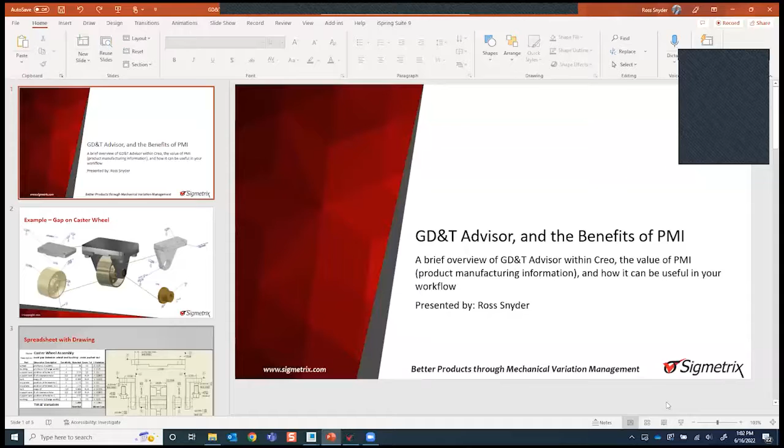Great. Let me get my screen pulled up here. It was giving me a little hassle to share. There we go. You guys see my screen okay? I can see, there we go. Yep. All right, it looks like it's blinking in and out here, so hopefully that doesn't continue. Ross, we see the user, or not the presentation mode of the PowerPoint, just so you're aware. Thanks. Oh, give me 1 second here. It's being a little temperamental with me. All right.

Let's just go ahead and share. There we go. How are we doing? Looking good, buddy. Excellent. All right.

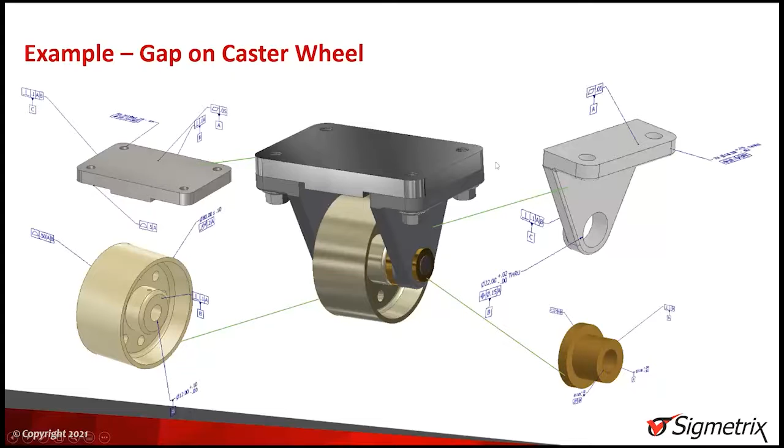Case in point, a lot of the information that you typically would walk through for, let's say, a standard tolerance analysis, like you can see here, if you were using an Excel spreadsheet, you would have to go grab your drawings, take a look at things, and kind of figure out what your tolerance loop is going to look like. All of these different annotations and dimensioning information that you've got on those different prints all have to be manually collected, manually added over into your spreadsheet, or God forbid if you're running through all this on paper.

And every time that you touch one of these different things, it introduces the opportunity for human error, or potentially not having the correct call or information translated to what you're using the information for. Versus adding these annotations in at the ground level in your assembly and them being a permanent fixture of your workflow walking forward.

With that, what I'm going to go ahead and do is pop over to the GD&T Advisor over in Creo that I've got open, and I will need to switch my windows here. All right. Great. So what we have here is a standard normal operating window of Creo.

Now, one of the tools that we have available to us here within Creo is, and I'll close this out for a second so it looks a little bit more familiar, our GD&T Advisor, which is a tool that we created that is available directly through PTC and is a plugin directly in the Creo environment. So if we click on this, what we have is an advisory tool that is going to help walk, especially new users that aren't particularly familiar with adding geometric dimensioning and tolerancing to their parts. Now, this particular resource, again, just a quick add-in here within the Creo environment.

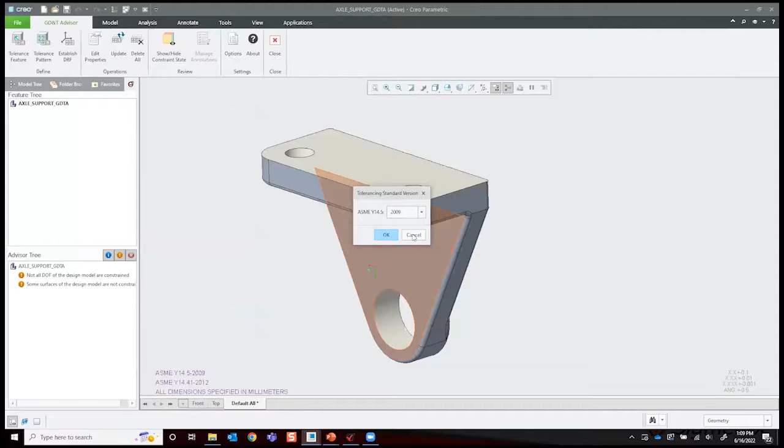Whether we want to change those, we can make those adjustments, as well as adjusting different standards, whether you're trying to follow the 14.5 for 2009 or 2018. Those can be dialed in right here within the GD&T Advisor itself, so that the annotations that it helps assist you put onto the actual part going forward, you can be confident that they're going to adhere to the standards that you're being held to inside whatever requirements that your parts have.

With that, just a quick overview of what and where everything is here within the tool itself, for those of you that haven't seen this before. Over here, we have our feature tree and our advisor tree. These two areas are going to be where most of the specific information, as we walk through the process of adding our different annotations, come into play. The feature tree specifically is going to start showing the different callouts that you put into place, as well as the different datum schemes that you have in there, what's being used, what's not being used, etc.

Down here is the advisor tree. This is more of your information pieces and your advisory notations from the software itself. This is what's really going to let you know that you're missing things, something's not quite right, etc. Over here, obviously, we've got our main screen where we can see the part that we're working on within the Creo environment. Up here at the top, we have all of our different toolbars. This is ultimately where we're going to spend most of our time today, just using the tolerance feature and a little bit of our properties. And I'll show you what the cool multicolored box does in a little bit as well.

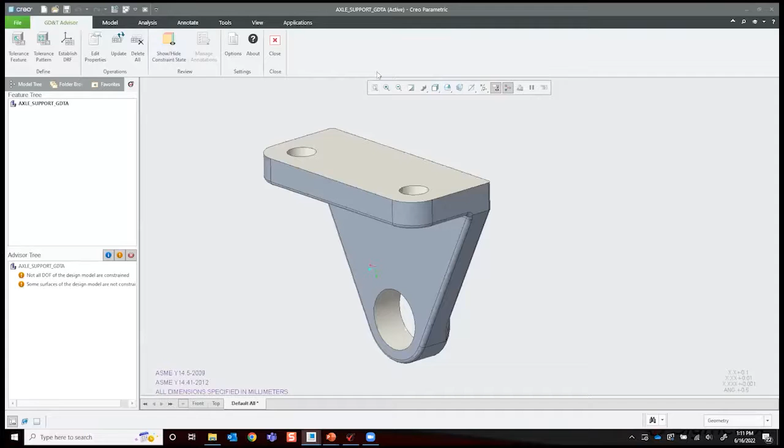With that, this part here that I have open right now may look a little bit more familiar if I rotate this, kind of like the picture that we had earlier. So this is one of the supports that was in that caster wheel assembly, where it bolted up to that top plate, and you had the wheel up in the center, and there's another one of these on the other side. So what we're going to do is add the PMI information, the actual GD&T annotations, to this part here that we're then going to later use in the CETOL environment. And I'll show you where that information, once we have it accurately placed, which is already a great thing to be able to do, can be useful downstream in your workflow as well.

So with that, we can see over here, our advisor tree is letting us know that not all of our degrees of freedom in the model are being constrained properly, and some of the surfaces are also not being constrained. So those are going to be our two targets today as we go through and try to add GD&T to this part, that we really want to take care of those two items.

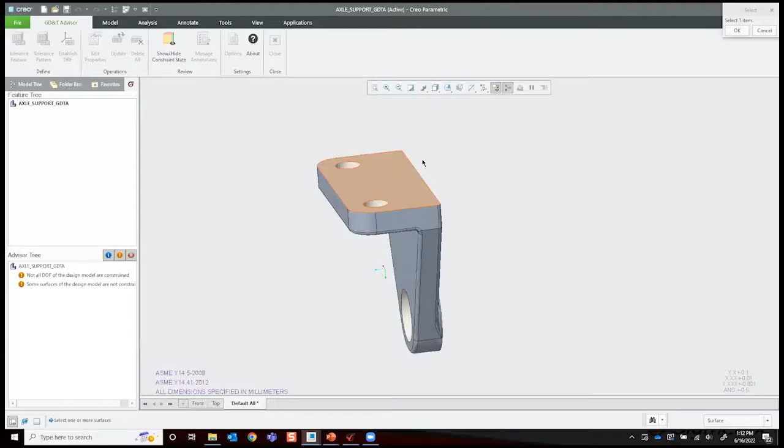So to start things out, we're going to need our first callout, presumably what we're going to call our datum A. So what we're going to do is hit tolerance feature. And I know that the main thing that we mate up to that top plate is this top surface. So let's go ahead and select that, and we'll hit OK. Now, what you can see up here is that our toolbar has changed, and this window has popped up for us to populate effectively what is going to be inside our reference frame for our GD&T callout.

So you can see here, we can name this if we'd like to. We can pick what kind of a scheme we're going to be doing, whether it's just going to be a regular dimension or what we're targeting for everything here today is going to be our geometric tolerancing. And this is where we're going to pick the information that's going to be going into the actual frame itself.

So we can see here already that it's recommending that we go with a flatness callout, which is what we're looking to do. So if you're a newer user, you're not really sure what you need to be using for things, GD&T Advisor is going to make recommendations that are logically based off of either what you have defined or the kind of surface that you've got called out. You can see there's a little asterisk right there. That's kind of the best guess the software has for walking through that process. So we're going to leave that as flatness here.

Now, admittedly, I have a sheet in front of me that effectively is our print for this. So I know what the tolerance value needs to be. But this is where we would add our tolerance value for the actual callout, which will be 0.05. And then over here on the right, you can see that it's recommended, especially because this is one of our first features and we don't have any other datums going on, that this be a datum feature, and it is going to be our datum A.

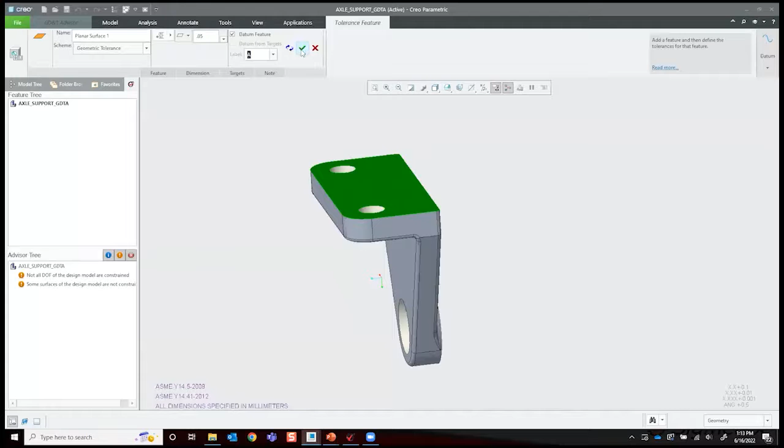Now, we can make adjustments to that. We can turn that off if we're trying to just add a quick annotation to something. But for this particular one, the GD&T Advisor's got this spot on. We're looking good. So we'll hit the little check mark here. And then you can see that it's dropped the annotation right onto the part over here.

Now, we have that first DRF that has been placed, and we're not using it for anything yet, but that'll change shortly. And we still have a couple degrees of freedom here that we need to account for. So let's go ahead and try to get our datum B in. Now, datum B is going to be over where this flat surface mates up with our bushing that pushes into here. So we'll go ahead and pick tolerance feature, and we'll select this flat surface here and hit OK.

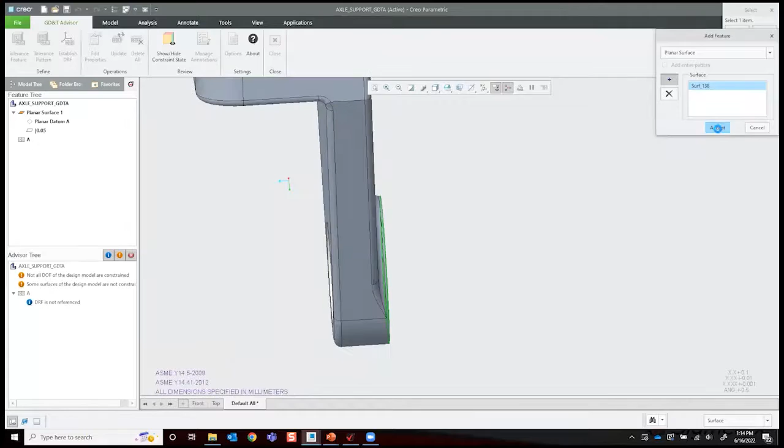And now, again, you can see that up here at the top, it's changed, but this time our recommendations are a little bit different than they were last time. So now we have that first datum that we could potentially be referencing. It's not the only thing out here. So we've got a couple of different recommendations that the software is putting out in front of us. And perpendicularity is what we're going to be looking for. And because we're doing that, we also are going to reference that datum A for this particular callout as well, which it automatically generated. And we could potentially change that if we'd like to. But again, GD&T Advisor's got it spot on.

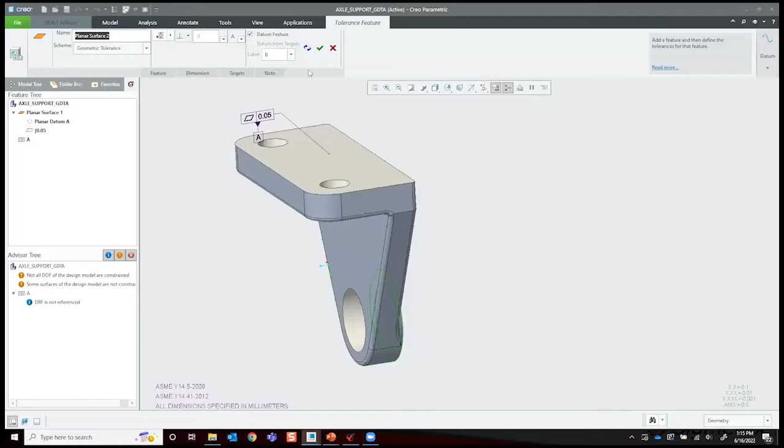And I'm going to go ahead and change that to a 0.1, which is what that's supposed to be here, according to our print. And datum B is what we're going to be leaving that as. We can go ahead and check that box and hit OK. So now we've got those two callouts, and that's looking good. Still missing a couple things here for controlling this for all of our different degrees of freedom.

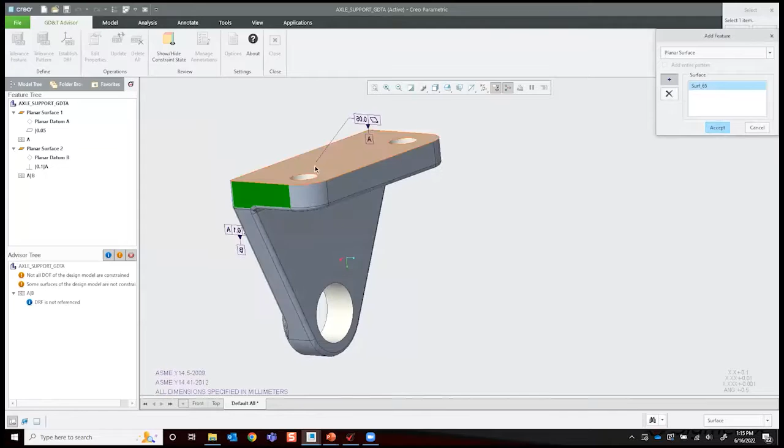And it looks like we took care of that, not using our DRF for just A, but now AB is not being used. Well, we'll be taking care of that when we add in our datum C, which we'll do on this back surface here. So we'll have that flat, this flat, and this flat here to control our different degrees of freedom.

Now, looking up again, this is recommending we use the perpendicularity, which is fine. But as we open this up, there are some different other options that you could use. Something that's cool about this as well is that if you hover over some different items, it will also give you explanations for why it probably isn't the best choice to be using for where you're at right now. And again, we got our little asterisk, so we're going to leave that there. And this one is another 0.1.

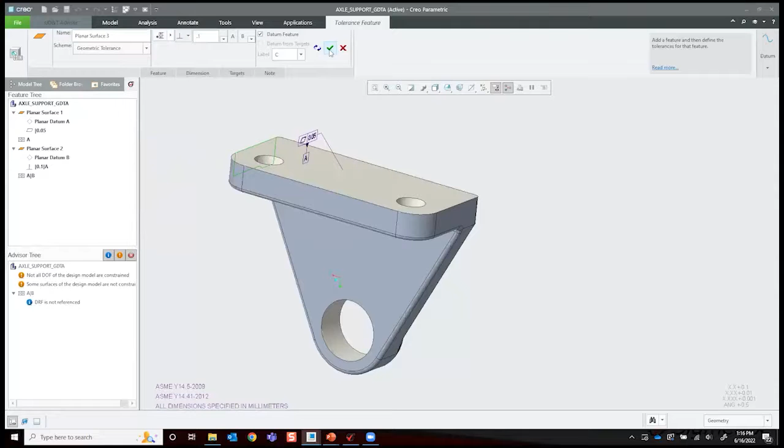That's referencing our AB, which is what we needed over here, and is going to be our datum C. So we're looking good there. Now, something else to keep in mind is if you were looking to add further refinement to any of these, that's something that you can do over here. And you can add additional layers to your callouts here, but we're going to go ahead and put that back to just the single callouts because I would like this to match our assembly that we're working towards later, so that we can see the progress between doing this and using it.

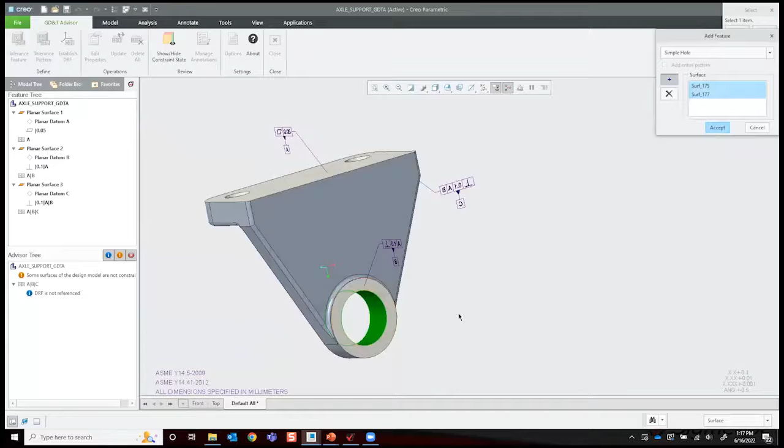So we've got our A, B, and C callouts here, and I will say that we are going to add another callout here because this is a fairly critical feature. I'm going to go ahead and tolerance the actual hole that our bushing goes through and our axle goes through, and hit OK. Now, as we go through, again, walking through the process and the recommendations, it's got our position tolerance in place, which is what we're looking to do. And that particular value is going to be another 0.1.

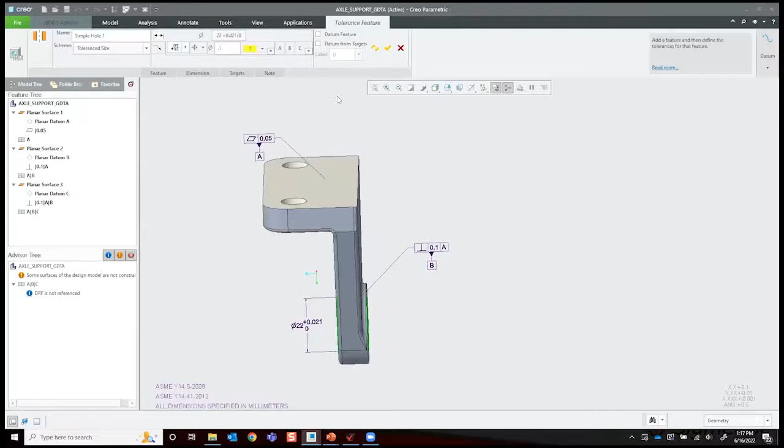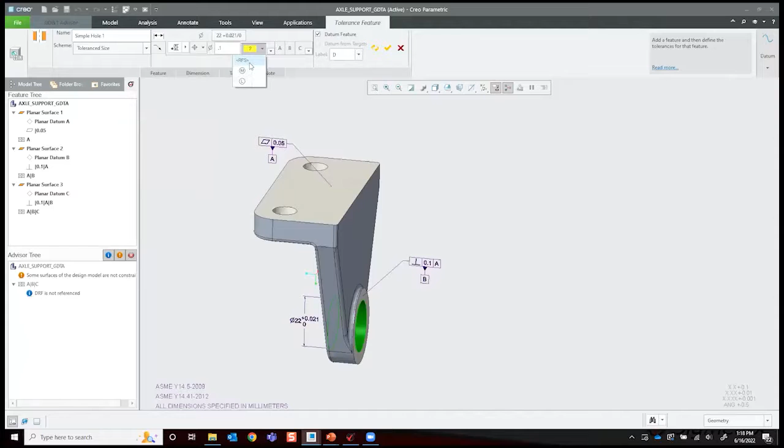We only need this for referencing A, I'm sorry, nope, this is supposed to be A, B, and C, and this is exactly what the recommendations were right out the gate. And something else we could also consider doing is adding this as an additional datum if we need to reference this ahead. Now, let's say you've got a new user working through this and everything is going okay. And it's like, okay, well, I'm adding another callout. This has to be another datum. So let's turn that on as a datum feature for right now. And we're going to leave this at RFS and hit OK.

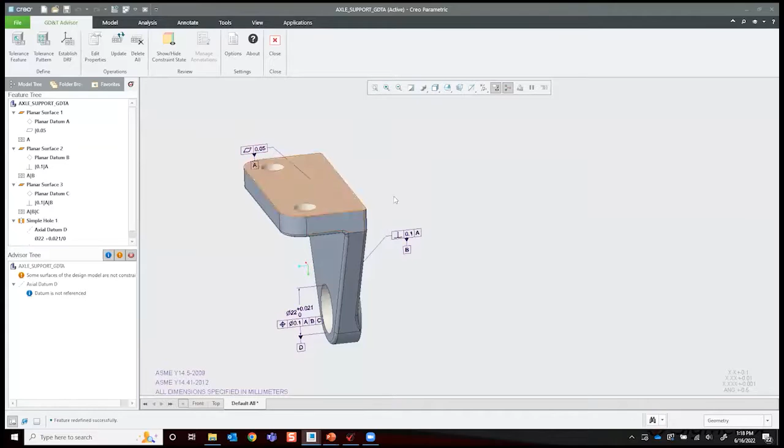Now, while not technically wrong, especially because we're still mid-process, one of the things that is probably not what we're looking to do here is we've called this out as datum D. This was the last callout that we really needed to do for this particular part, in addition to the regular dimensions that are already in place in the actual assembly. We're not going to be using this for anything. And over here in the advisor tree, you can see that it's letting us know that it's not being referenced by anything. So let's go ahead and edit that, and we're going to turn that off as datum D. We really don't need to do that. But that alert to the fact that you're not going to be using anything can be really beneficial for especially some of your newer users.

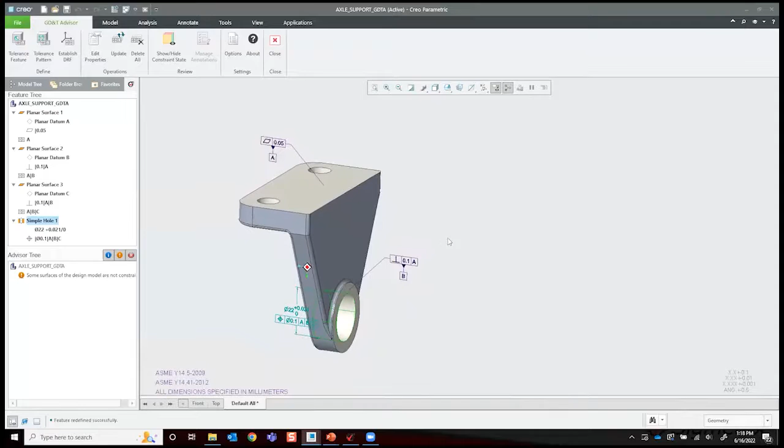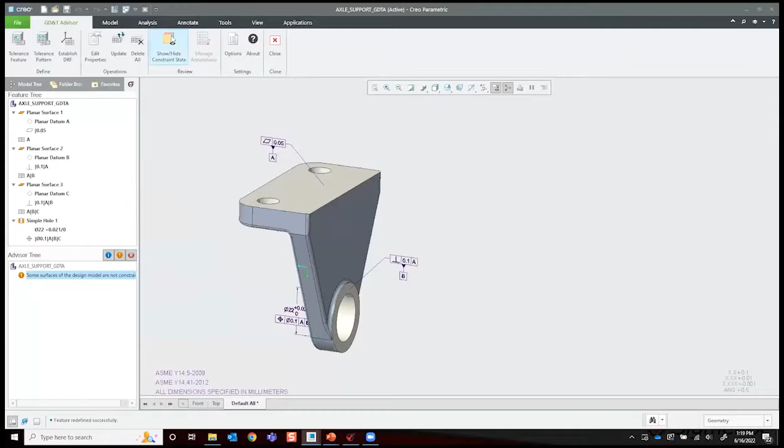Now, we've taken care of all the different callouts that we really need for moving forward with this particular part here, but the advisor tree is not quite happy. Well, this is where some of our other tools are going to come into place. There are some different surfaces that are not constrained within this assembly, and we'd like to at least give some sort of a basic tolerance to those items so they don't get too out of control. Up here at the top, we have the show hide constraint state tool. If you click on this, this is one of our visualization tools, and it's going to highlight all the different items that you have specifically identified with a tolerance, so that they are fully constrained, partially constrained, or in the case of most of the other surfaces here, unconstrained.

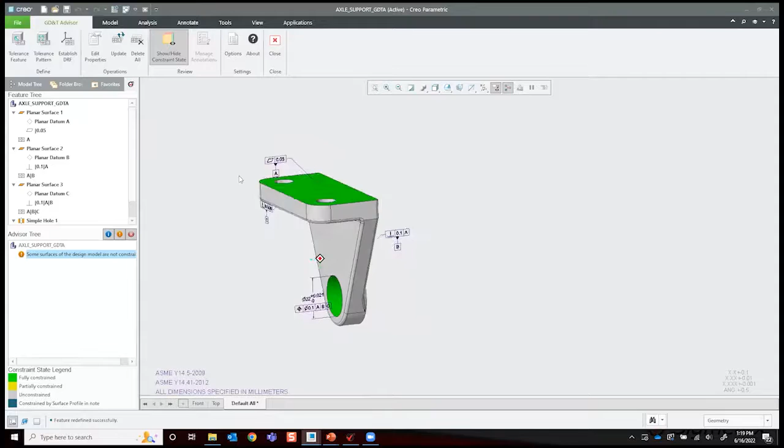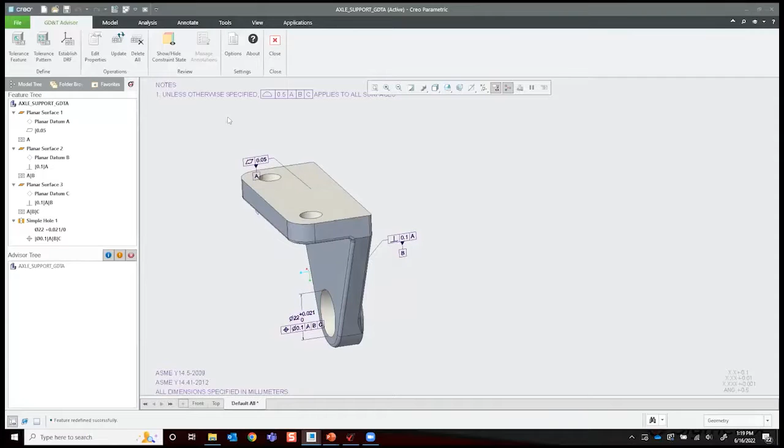So what we'd like to do is control all of the rest of those with a surface callout. Now, I'm going to go ahead and turn that off. All we have to do is go over into our properties and notes, and we can actually add a general profile tolerance directly to the area. And we'll just leave that as a nice soft 0.5 and hit OK. Now, as we add that in here, you'll see that the note drops in. And if we click on that button again, all those blue surfaces are the ones that are controlled by this particular note here. And all the green ones are the ones that we specifically defined, particularly with the datums, but with everything else that we got going on.

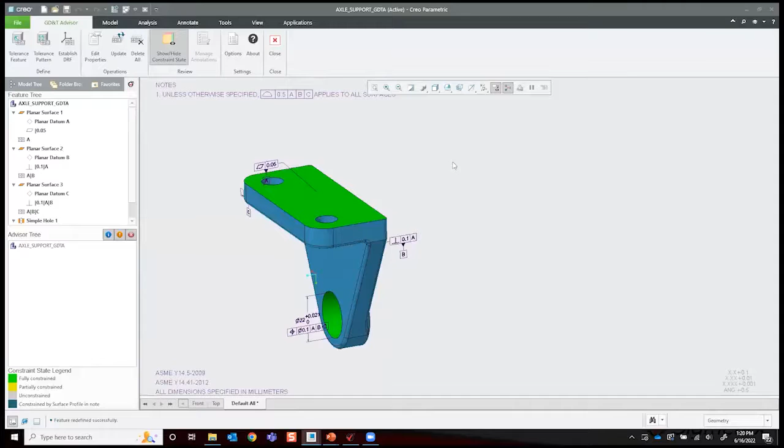So overall, that is what the quick sample of the process of walking through GD&T Advisor looks like with your tolerancing information.

Now, something to keep in mind is that this is not just to figure things out. This is actually annotating the part itself and authoring these things instead of using the onboard annotation tools, because sometimes they can get a little hairy or let you do some things that aren't technically in accordance with some of the standards that you need to be following.

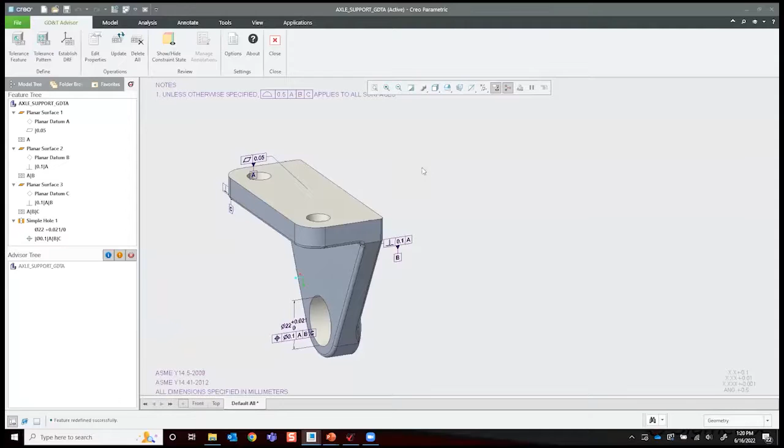With that, I'm going to go ahead and jump us over to the next tool, but let's talk about that for just a second here. So what we're going to be doing in CETOL here, which CETOL is a tool that we over at Sigmetrix put together to do tolerance analysis in the three-dimensional space. It pairs up with your assembly and allows you to not only just crunch the numbers for your actual tolerance analysis, but there's a lot more functionality and interactivity with the actual tool itself.

So what we're going to be doing today is taking the model that we did all of those annotations for this part right here. Those annotations have already been done to save you guys watching me walk through every single one of these individual parts, doing the same. And that information is going to import and come through our tool CETOL, but this could be a number of different tools that interact with that information. Having that available within your assembly can be very useful downstream. This is just one example of being able to use that info.

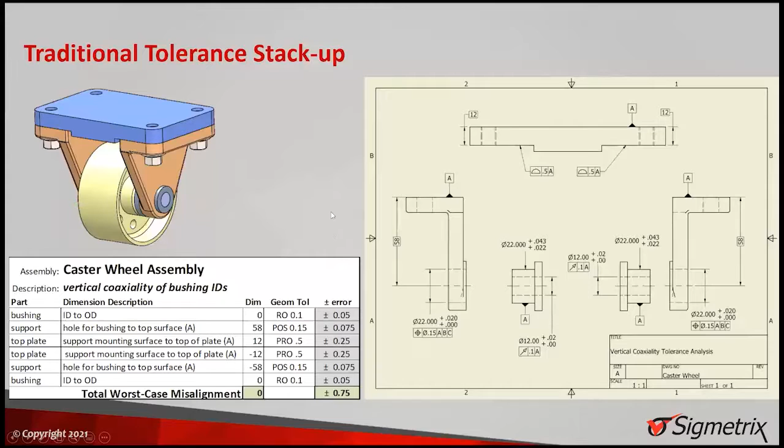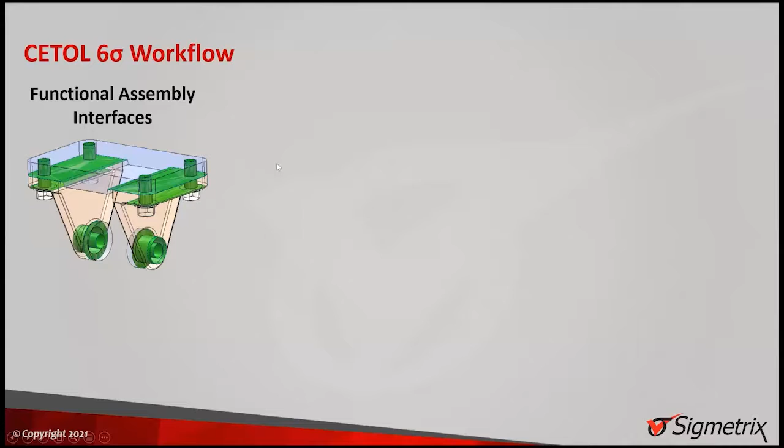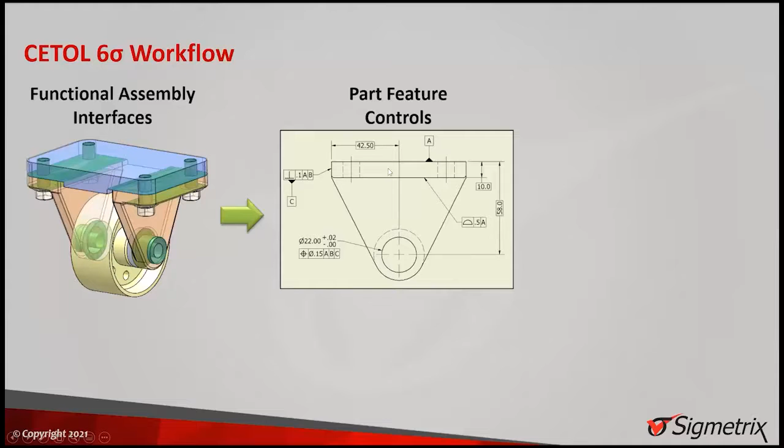The process that we're going to walk through is we're going to first identify the different critical surfaces that we have within our assembly in CETOL. Then, once we've figured that out, our step 2 is going to be adding the dimensions and constraints and the different dimensional definitions that we have for our assembly, so that we know that that tolerancing information is accurate. Now, this is really where you'll see that PMI come to play and be useful, because typically our tool is capable of being used whether or not you're manually adding the different information from your GD&T callouts or standard dimensions. But something else that we can also do here within our tool is import a lot of that PMI.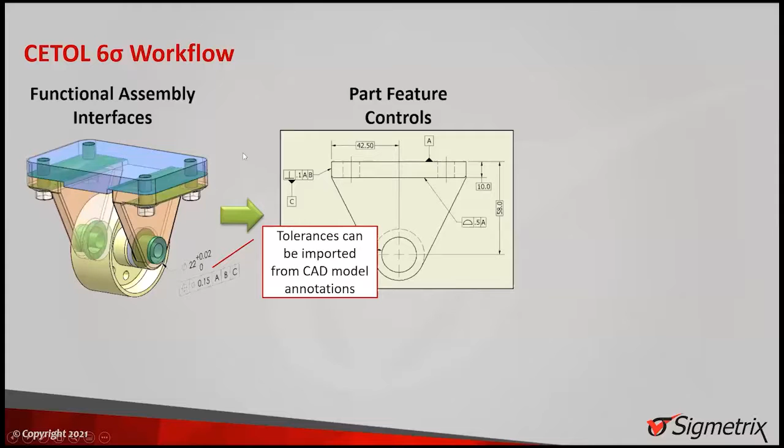And this is kind of the example that I'm building over here, is that a lot of that information you are going to be putting on your drawings anyway. If you take the time and you put it in your assembly, a lot of digital tools and resources that talk with your design information can take a lot of that directly from the actual CAD files and work with it, instead of you having to manually input everything. And that's going to be the case here, as we import not only the GD&T callouts that we put in here, but the basic dimensions that we have in place for the actual parts in our assembly, as well as assembly constraints.

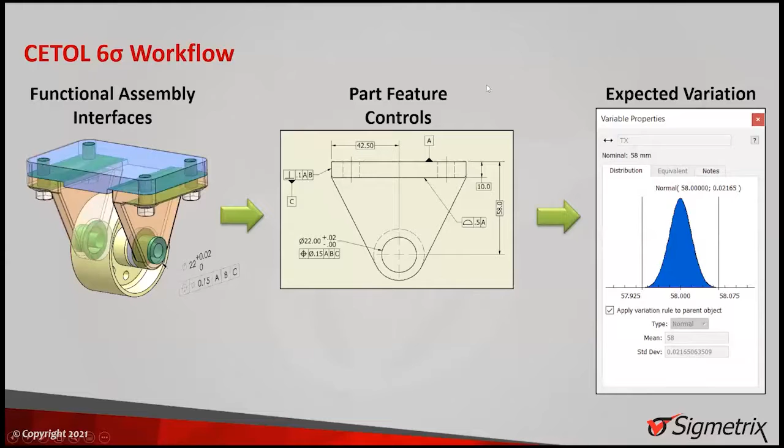And then from there, I'll show you guys real quick what the results of that are, but we won't dive into too much detail. I'm not trying to talk you guys over too many different software items today. So with that, I'm going to jump back over into Creo, and we're going to bring up the CETOL tool.

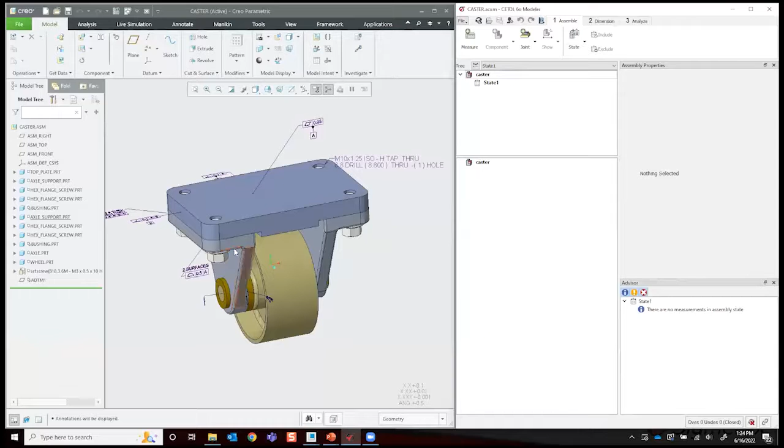Now, over here, this window is CETOL. It's effectively a side-by-side bolt-on for the tolerance analysis software. And over here is just the assembly of the part that we were working with earlier. Again, I left these on for a second so you can see we have all those different annotations like we were working with before. But I'm going to turn them off because they get a little much to look through while we're walking through this.

Over here on the right-hand side, just to give you kind of the 10-cent tour of CETOL here, we've got our measurement tree and our model tree. We refer to tolerance stacks in CETOL as a measurement, so you'll hear me throw that word around a little bit today. Over here on the right is our properties window. As I pick and click my way through different things, you'll see this window change with the different details of the things that we have highlighted.

Down here, we have our advisor window. This is really similar to what we saw in the GD&T Advisor tool, in that advisor tree that we are getting those notifications. Very similar over here, except this is going to be our advisor through the tolerance stackup process of what we're walking through today. And those 3 steps that we walked through really quickly in the PowerPoint are mirrored here in our toolbars as well.

So we've got step 1 where we're going to be defining the actual stack up that we're going to be doing with a new measurement. Step 2 is where you would be adding that dimensional information. And step 3 is where we take a look at our results. So with that, I'm going to go ahead and get started.

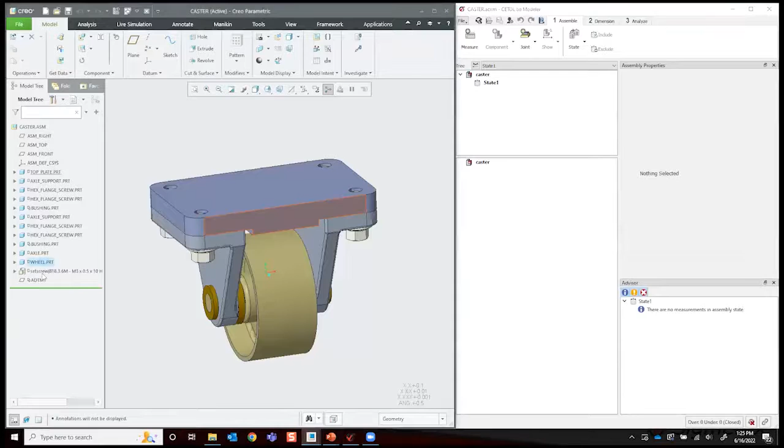First and foremost, let's go ahead and hide these couple items here because they tend to get in the way. There we go. So what we're going to do is add a measurement here and pick our way over in the Creo environment. We have to relink our guys here first. There we go. And what we have to do is go through and pick the different items that pertain to the tolerance analysis that we're running.

So we know between those 2 bushings is what we were looking at before, but that visualization that we get up here as we start defining things doesn't look quite like what we were trying to target for this particular analysis. So all we have to do is make some adjustments to the directions that are referenced for that vertical component. So now we can see those arrows are up and down, as well as let's go ahead and change this to axis here and lock that back up.

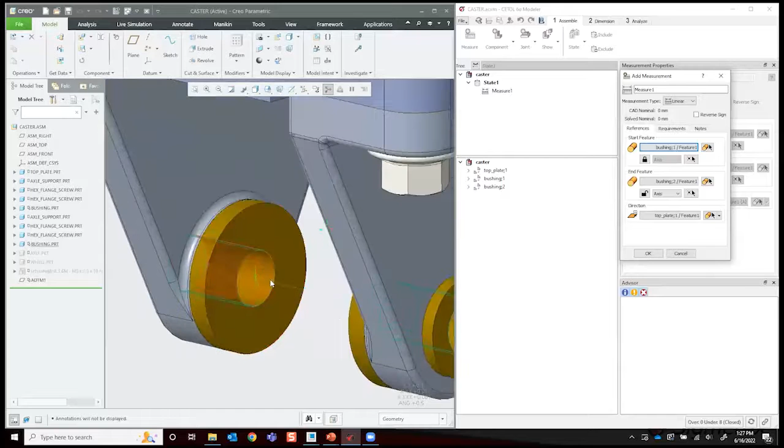And just so you know, the results that we were targeting for the spreadsheet we were just looking at were plus or minus 0.75. I'm not pulling the numbers out of thin air, but we'll set our requirements as well, just so we have those moving forward. And now you can see in the window with the actual part that center axis, and I'll rotate this a little bit because it's probably hard to see on your screen with that white. We've got that center axis that we're trying to measure off of in a vertical direction, referencing that top surface here. So looking good, we'll hit OK.

Now, over here on the right, you can see that our advisor window has changed from, hey, you need to get the ball rolling, to, hey, you've got some stuff that's under constrained. We can click on those and see that those bushings that we're trying to measure between that yellow set of arrows are letting us know all the different degrees of freedom that are not being constrained right now.

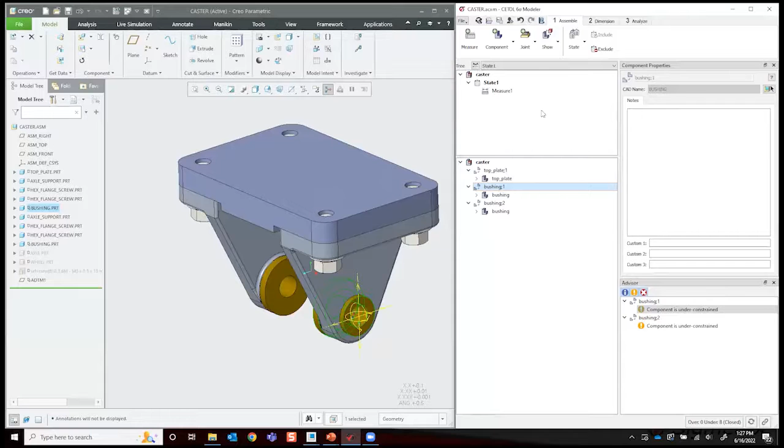Over here in your modeling tree, you can see the information start to populate for what CETOL sees as part of your tolerance stackup. Now, we also have a cool visualization tool in here, like we do in GD&T Advisor, except this one is going to let us know what CETOL actually sees as included in the overall stackup. And after I click that, you can see that, wow, a whole lot of different parts just disappeared. What gives?

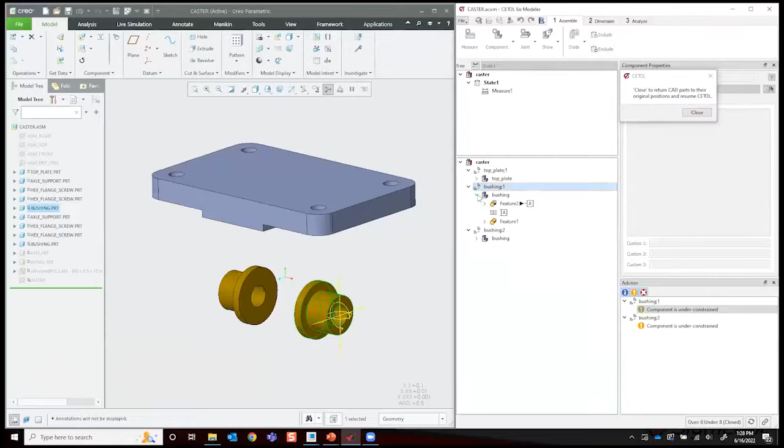Well, right now, all that CETOL has to go off of is the 2 bushings and the referenced surface that we used to define our problem first. We need to add in all the rest of those components, because as we start adding those different items in, that information is going to come over and help us constrain those under constrained items so that we don't have to manually do it ourselves.

So let's go ahead and we're going to add component, and we're going to walk through here and walk down our list. And we can see here that, make sure I hit both of the hex flanges here. And I'm going to hit show locations again, because you can see that down in the advisor, every time we select something, it updates to keep us up with the latest of the information that we're working with in the session.

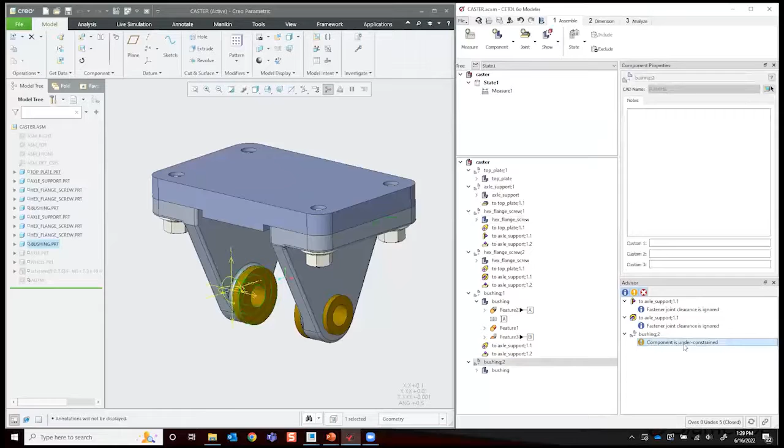We can see that we still have that one bushing that's under constraint, but the other one looks like it went away. So if I hit show locations, as we added those different items that control where that bushing's at, our support that we were working with earlier and the 2 screws that go into here, you can see that it took care of that.

Now, part of the reason it took care of that, and we'll dive into this a little bit more, is as you can see, all these different line items here are more than just the part names. These different items, as we start adding these in here, are all of the different bits of information that we are able to pull out of our assembly into CETOL. And this is what I'm talking about with that PMI.

So now that we've got no more errors, everything's been controlled by those different items that we've brought in here, you can see, man, there sure are a lot of line items over here in our modeling tree. Now, if we start expanding some of these items, you can see that our datum information, the GD&T callouts that we've added in here, our dimensional information for features of size, that information has all come directly from our assembly.

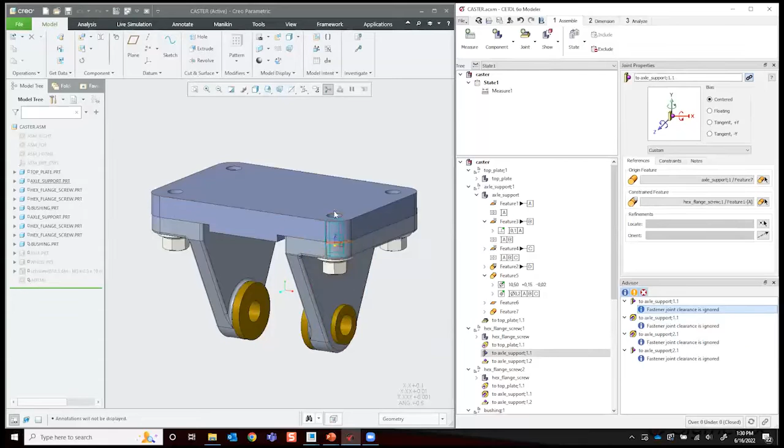Now, this is really where the time save comes in, because while CETOL is able to take any degree of you having those different items here, by having that fully defined and fully constrained, this is typically where we would jump to step 2, because we don't have any more errors in the advisor window. It's just letting us know that we can make some adjustments to the way that our fasteners interact with things, for instance, floating them, but we don't need to dive into a lot of that here today. This is where we would jump over into tab 2 and start working with our dimensions.

But because our part has been fully dimensioned and we have all those GD&T annotations inside the different parts within our assembly, we don't have any outstanding requirements for the problem that we've set forth to add in here. There is no manual dimensioning that needs to be done right now. So that saves us a tremendous amount of time for basically doing the same work we would have had to do on paper with our prints anyway. We just moved up the timeline a little bit and did it with our initial design phase.

And now all that information is available to us over here, including our assembly constraints, the GD&T callouts, et cetera, for all those different components, or at least the components that it's available for if we didn't happen to have all those. Let's say your vendor sent you that top plate or something and didn't really send any of that. The rest of the information would still come in. You just would need to manually add that.

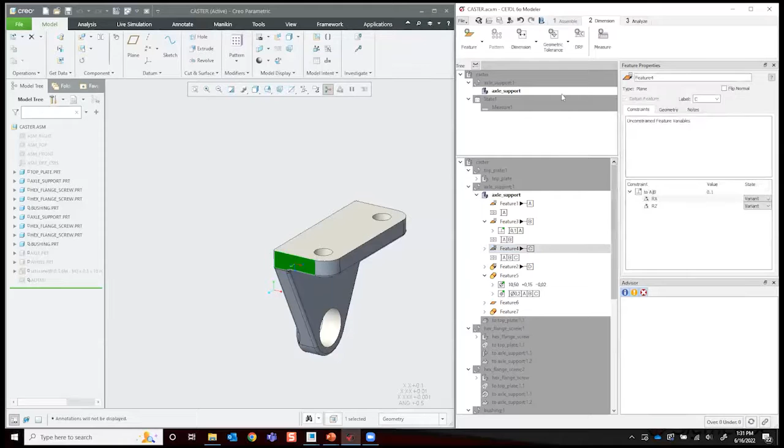So if we were to go through and do that, we could isolate one of these components. We'll take the one that we were working on earlier as an example and go through and add those different dimensions just by adding a dimension and walking through the process of doing that. But as you can see here, there's our datum A, that top surface that we were working with. Datum B, that flat that we were working off of there, is our datum C, that back surface, as well as we've got that as datum D in here just to showcase that example.

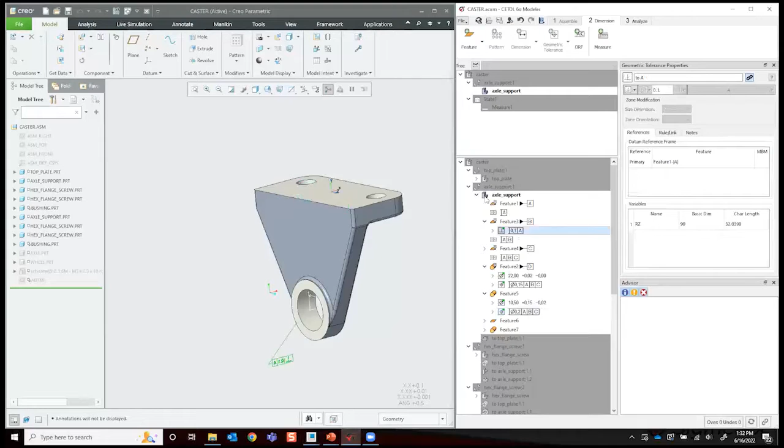There's a lot of really intelligent tools out there these days that tie into that information, and that can be really beneficial to your overall workflow and saving time and making sure that you don't have to manually add in each one of those things and risk fudging a number or something, or accidentally transposing two different dimensions and your results being all out of whack.

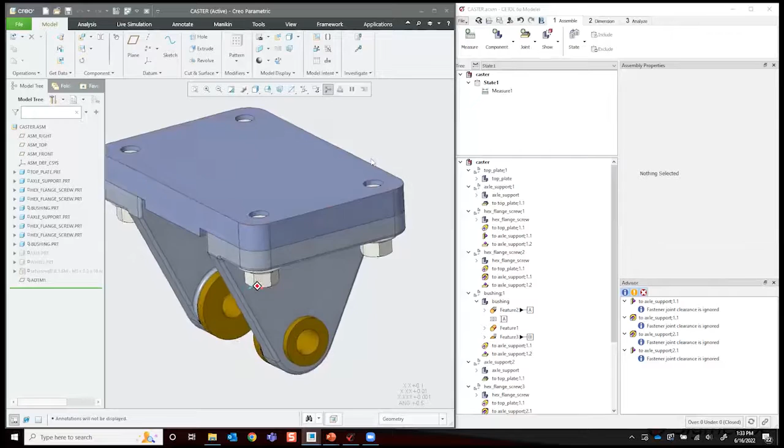Something else that's also really cool here, and we'll skip over step 2 because we did it ahead of time and we're ahead of the curve here, and jump over into our analyze window, and we'll hit solve and take a look at our results.

Now, what's cool here is that CETOL gives us the results for our worst case and our statistical results for our tolerance analysis, our distribution information, our quality metrics. We can adjust the requirements if what we put in there, or if we didn't put anything in there before, wasn't quite right. Something else we can also do is add particular CPK targets. If you've got a sigma value that you're looking for, things like that, you can drop those in as well.

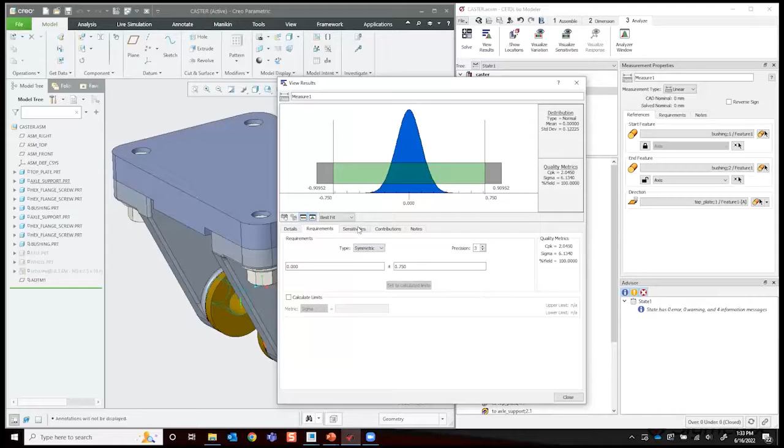CETOL also allows us to take a look at some of the sensitivities and contributions here. But one of the things that I like to use within the tool is another one of the visualization tools. So I'll show you guys this real quick because it's kind of neat. If we take a look at the visualized variation, this is going to just run us through an animation real quick of the upper and lower limits of our overall stack up and kind of positionally where our worst case is looking. Hold on, let's start that animation up again.

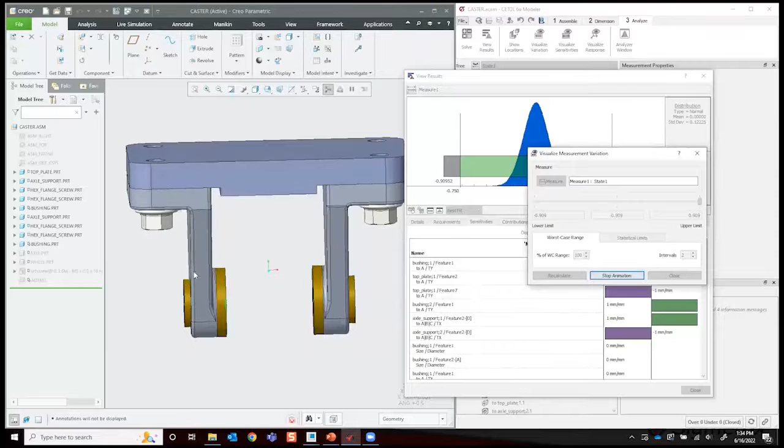We've got a little wiggle in our part, and our part was successful when we looked at that particular study in the one-dimensional analysis that was in Excel, in our PowerPoint presentation we looked at earlier. But it looks like we're kind of in the out of bounds area here for running it through CETOL. What gives? Well, having looked at that rotation, it looks like there's a rotational element that we missed or we're not seeing within the other study, and that makes sense. We're using a 3-dimensional tool that has all of our data, not a 1-dimensional tool like Excel to walk through that process.

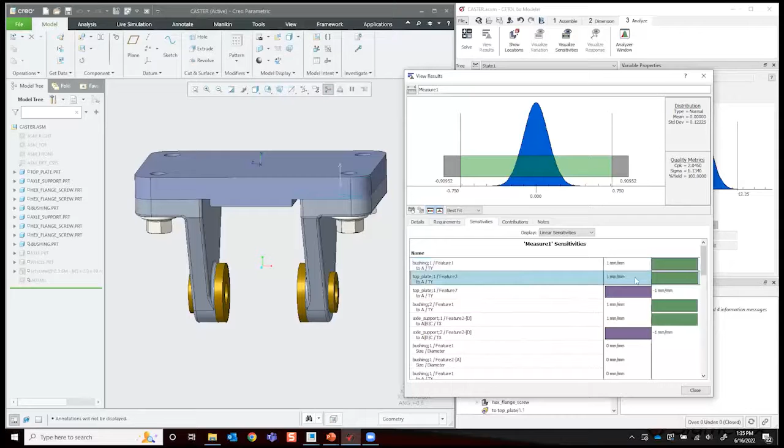So to take a look at maybe why that is, our sensitivities tab is going to give you a hierarchy of highest to lowest impacts of your study as far as your measurement and dimensional information goes within the part. Now, this is a fairly linear study. These are your linear sensitivities. Moving 1 millimeter impacting your results 1 millimeter, nothing really out of the ordinary here. But if we look at our angular sensitivities, you can see that that's definitely not 1-to-1.

And as we highlight these different items, they highlight over here in our Creo and showcase that exact rotation that we were looking at before in those 2 different areas. Okay. So we're on the right track. That's looking like the right area that we need to be focusing on. And as we have those selected, it's also highlighting those different items here in our measurement tree. Our contributions tab will help us dial this in a little bit further.

And something else to consider is this is going to give us the main contributors to our overall results from a tolerancing standpoint. The different degrees of variation that we could potentially have for different things within the tolerance range that we've got. And as we can see here, the largest contributors that we've got are those 2 surfaces here that have that surface call out that we have put in place, that 0.5. So again, our PMI is coming to bat here and letting us know what we've got going on.

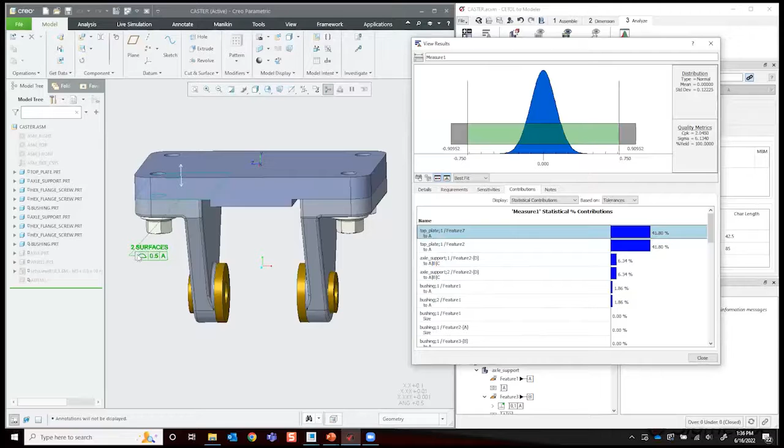But something cool that we have over here in CETOL is we can directly interface with that data that we brought in from our actual assembly and make quick what-if studies. Let's tighten that tolerance up a little bit and see what happens. So if we bring that in, we've adjusted that surface call out from a 0.5 to a 0.3. Now that may seem drastic, and it looks pretty drastic, especially considering where our statistical results are, but we can play around and we can back that off to maybe something that makes a little bit more sense, but isn't quite so within the confines of what we're looking at.

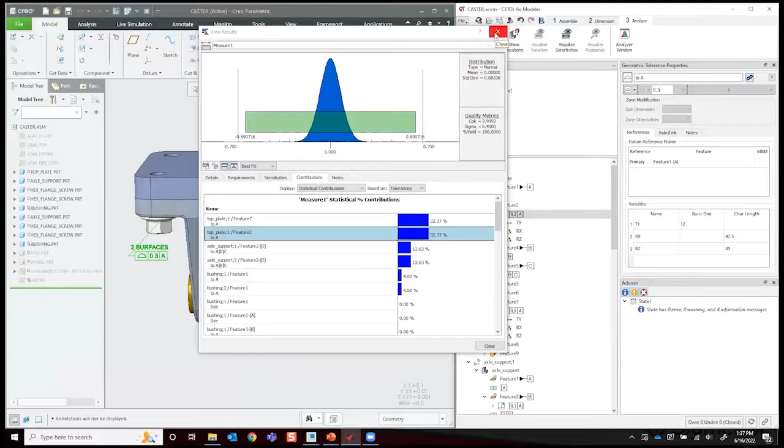So there's a lot of different ways to use that information that not only we've added with GD&T Advisor, but PMI in general. When you add those annotations inside your assembly, that information is part of the workflow now. A lot of different tools, a lot of different resources, whether ours or others, like to talk to that information, tie into that data, and can be really beneficial to problem solving things without having to completely reiterate problems over and over again for a bunch of studies you don't quite have enough information to justify.

Again, like you saw before, it also can help save on some of the manual dimensioning time, or in our case, a whole lot of time for your tolerance studies and tolerance stack-ups as well. From there, we were happy to take a look at our results. We were able to run through all these different informations. Something else that's also really cool that our tool can do with the PMI data as well is typically we leave our CETOL tool defaulted to a non-authoring tool. So the information is flowing one way from your assembly over to CETOL.

If you wanted to really run a pretty interesting what-if study, and you were in the middle of updating different designs and people were playing with these different values, you didn't want to have to worry about relinking this and then that value being different and not being what you were studying. You can actually unlink these different annotations that were imported, so you can completely change them and what their DRFs are and what kind of a callout you're looking to do right here within the tool.